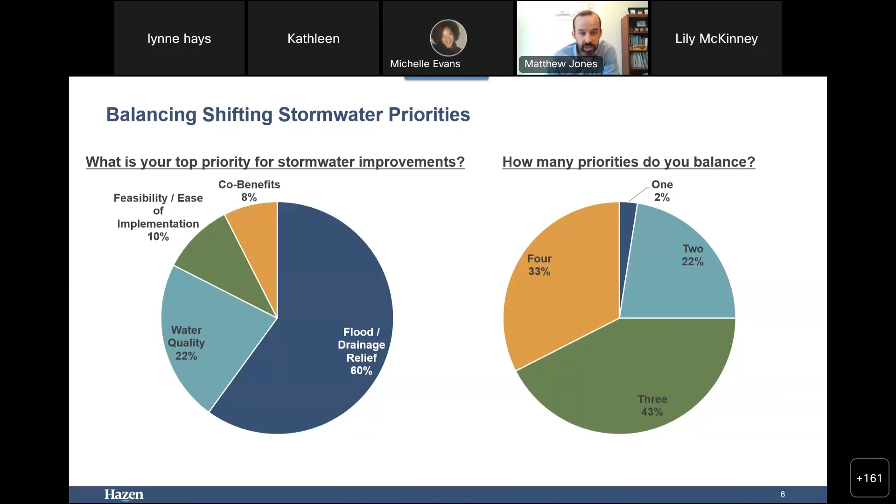Important context here: this is the Chesapeake Bay watershed, where water quality improvement and nutrient load reduction is a major focus. We asked two questions to about 40 to 50 people in attendance who responded to this poll. What is your top priority for stormwater improvements? You can see here 60% said flooding and drainage relief, even within a state that has major regulatory programs focused on water quality. Water quality was also a significant portion, but importantly, almost everybody was balancing multiple priorities.

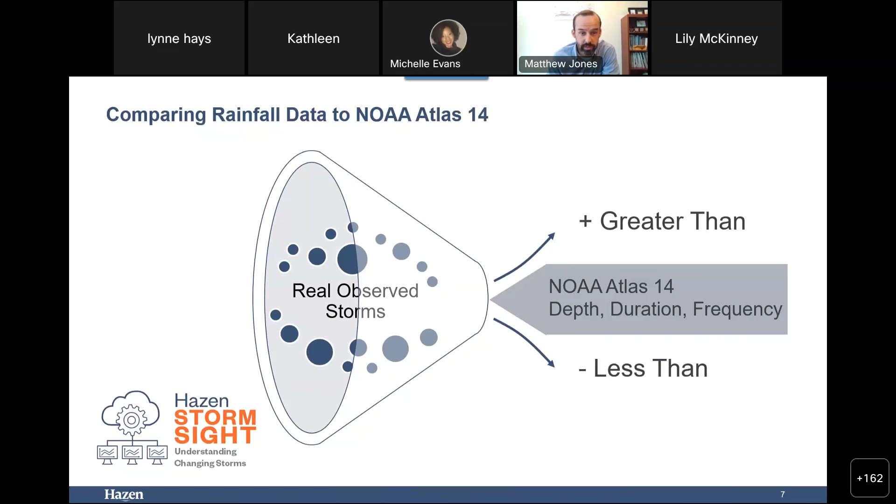This increases the importance of understanding what role green infrastructure might have in the context of changing storms and changing priorities related to flooding and drainage relief. So with those changing storms, we want to understand how they're changing. We have a tool we put together a number of years ago to help answer that question. We regularly get asked, that seems like a real major storm event, is that normal or not? This tool does some analysis, feeding in real rainfall data, breaking it into storm events, and comparing it to Atlas 14, to say whether storms are happening more or less frequently than Atlas 14 would suggest on average. Here's what that looks like for a few locations in North Carolina.

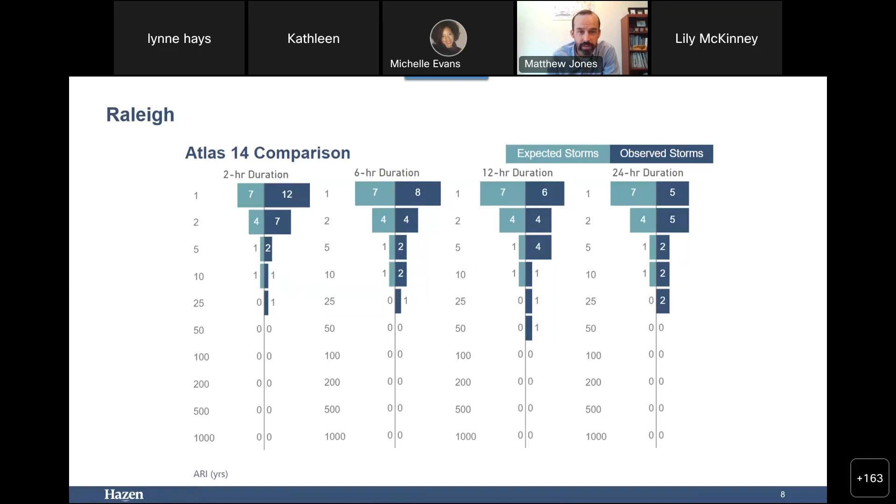You see different storm durations across the top, ranging from a 2-hour to a 24-hour duration, and recurrence interval down the side. For example, here in Raleigh, for a 6-hour duration 1-year storm, looking at about 7 years of rainfall data, we would expect 7 such storms but saw 8. You can see there are some departures when compared to Atlas 14. Some departures aren't altogether surprising statistically, particularly over a 7 to 10 year time frame, but we do see some differences.

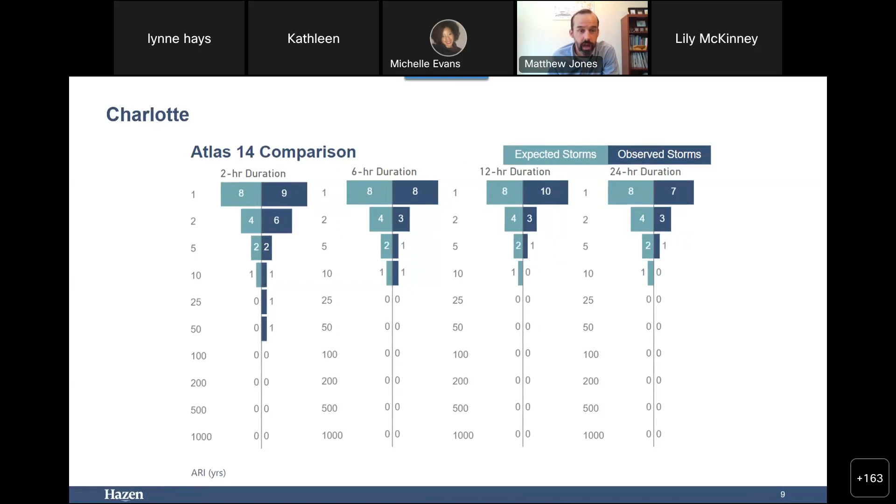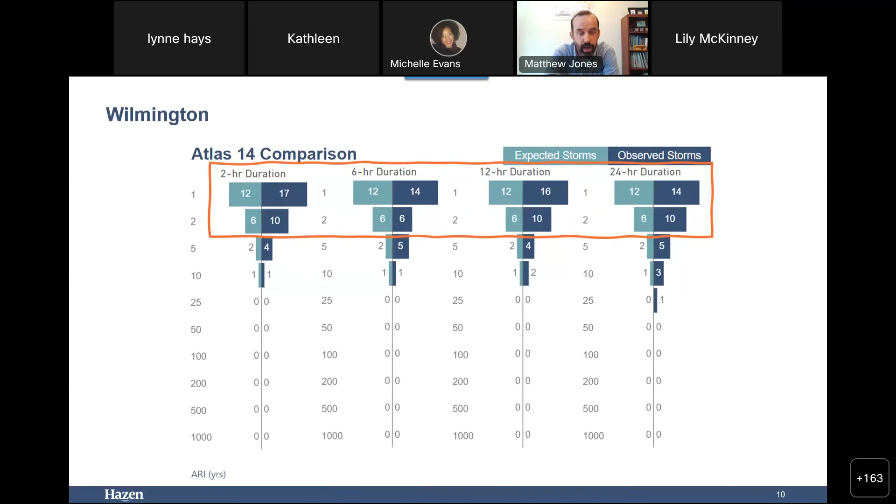Here in Charlotte, across the longer durations, it's pretty much in line with Atlas 14 expectations. For the shorter durations, we do see some departures with larger events. In Wilmington, we also see some departures, and notably, departures from what Atlas 14 would suggest for our 1 and 2 year storms. This indicates that over the past 12 years, we were seeing a bit more of an increased frequency of 1 and 2 year storms than we'd generally expect.

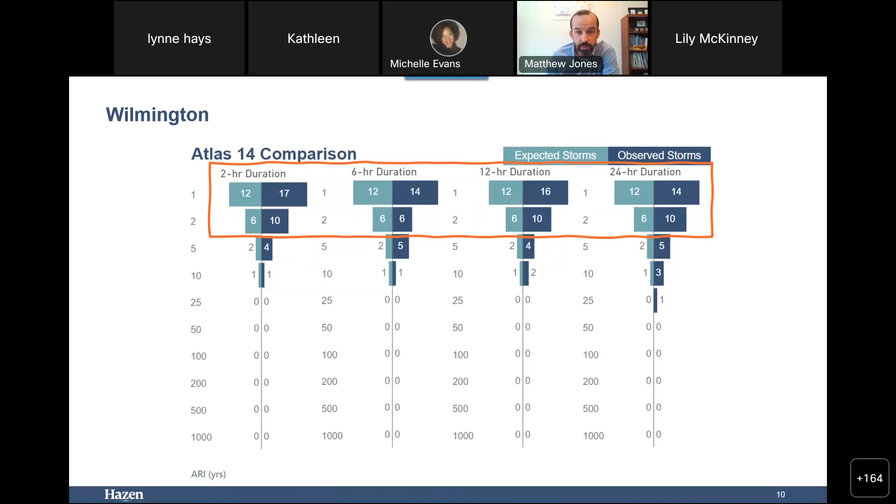One notable thing when we talk about green stormwater infrastructure in this context: I'm talking about stormwater controls designed to manage the water quality storm, in the neighborhood of an inch to 1.25 inches throughout our state. That's not the 10-year storm event, but closer to these more frequent storms we're having. It's also notable regarding the public's interests, since these 1 and 2 year storm events can cause nuisance drainage issues the public wants addressed. This gives early indications that green infrastructure may have a role in managing these more frequent storms where we're seeing departures from historical norms.

That's looking at the past, and that phenomenon of seeing departures, particularly for frequent events, isn't uncommon. We've run that analysis in a number of cities throughout the country, and it's a somewhat common finding. But that's looking backward over recent history. What about looking forward into the future?

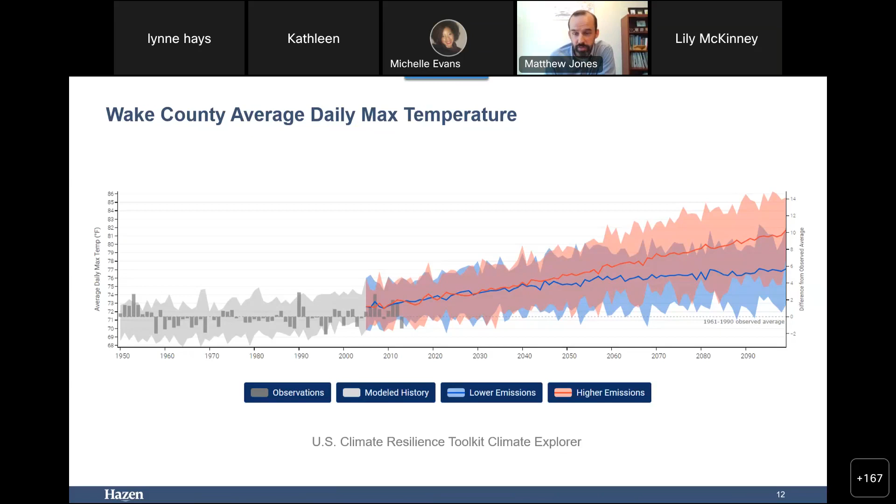But we do have some tools that allow us to look at that and approximate it. One is a SWMM climate adjustment tool that pulls in downscaled climate data, and for a given location, for different recurrence interval storms, you can see what projected change in that design storm depth is projected. So in this context, you've got different scenarios, different time frames.

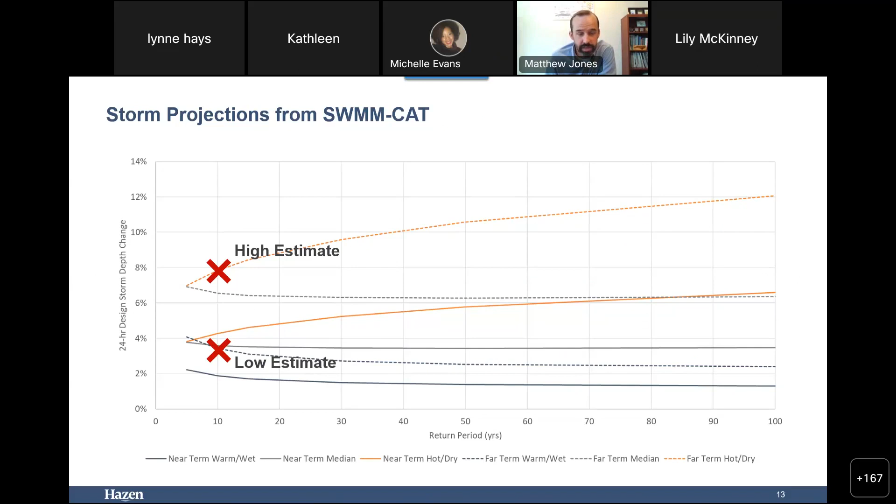To simplify things here, we'll pull in a high and a low estimate. When we look across North Carolina, you can see, here, this is for a 10-year, 24-hour design storm.

Much of what we're talking about here today is focused on that particular storm because that's a common target for drainage design and stormwater conveyance design. We're looking at a 2045 to 2074 timeframe. So here's our current 10-year, 24-hour design storm for these different cities throughout the state, and then a low and a high projected adjustment to that design storm depth, and what that means in terms of real storm depths.

You can see on the low end, those storms are projected to stay relatively the same. On the high end, on the order of a 5 to 6% increase, which translates to something less than a half an inch of depth increase.

Now, it's important to note here that there are a variety of ways of evaluating this climate data and coming up with different results. It doesn't cover North Carolina, but there was a recent study in the Chesapeake Bay watershed looking at potential changes to design storms throughout the Bay watershed. That study found those adjustments range anywhere from little change, similar to 5-6%, all the way up to a 20% increase for those 10-year design storms.

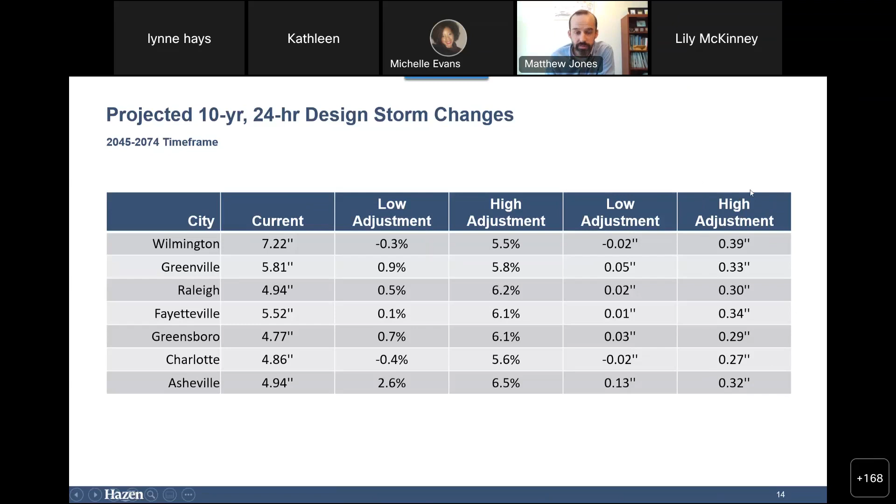But even with that kind of an increase, we're still talking about lower depths in the context of our common green infrastructure sizing, which is looking at a 1-inch storm event.

So how are storms changing? There's an increased frequency of smaller storms in many locations that could contribute to nuisance flooding when compared to our historical norms. And we see incremental increases in our 10-year storm depths.

Again, depending upon what analysis you look at or what data you're referencing, you can get into some different results. But I'm not aware, for something like a 10-year storm, of any projections, certainly not for North Carolina, that talk about doubling of these storm sizes or increases of that magnitude. We're talking about incremental increases.

So that brings us back to the question of what is the role of green stormwater infrastructure amidst these changing storms? Two sub-questions as part of that: one, can GSI mitigate incremental increases in storm depth associated with climate change? And two, can it play a larger role in managing localized urban flooding?

So beyond the competing priorities or changing priorities we discussed earlier, there would certainly be some benefits if green infrastructure can serve a valuable role here.

One of those is limitations of conventional pipe upsizing. This is something we're doing a lot of work on in some of the ultra urban areas in the country, where putting in a larger pipe network and carrying that to the receiving water is not a practical option because of the intensity of development and a variety of other constraints.

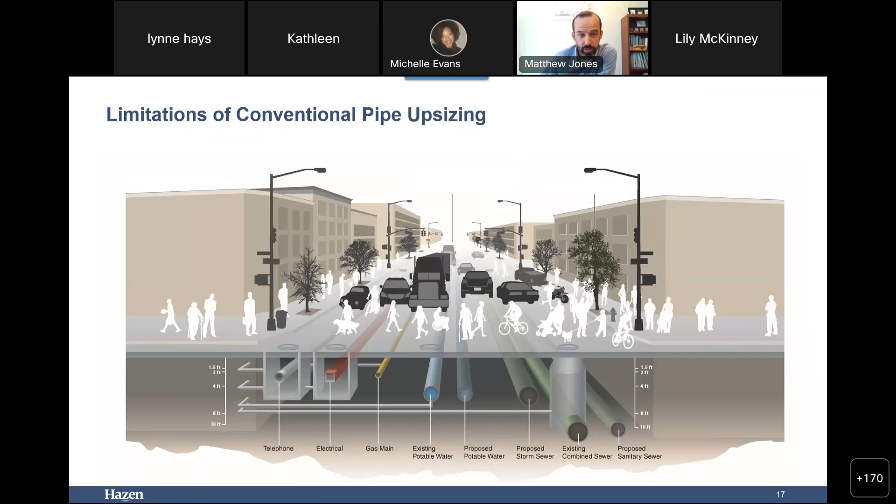And so in those cases, that's part of what we're looking at is what can green infrastructure do in those circumstances. The other gets to some broader implications for sustainability, community disruption, and that sort of thing.

When we talk about pipe replacement, spoiler alert, we'll talk about this at the end, but the point of this is not to say there's no further need for pipe replacement. That's going to continue to be a key tool in our toolbox here. But pipe replacement can often be a disruptive activity. Digging up a roadway has community impacts associated with it. From a sustainability standpoint, we haven't done a specific life cycle analysis, but you can certainly imagine the impacts in terms of greenhouse gas emissions and other sustainability factors of excavating a material, disposing of it, and replacing it with new material.

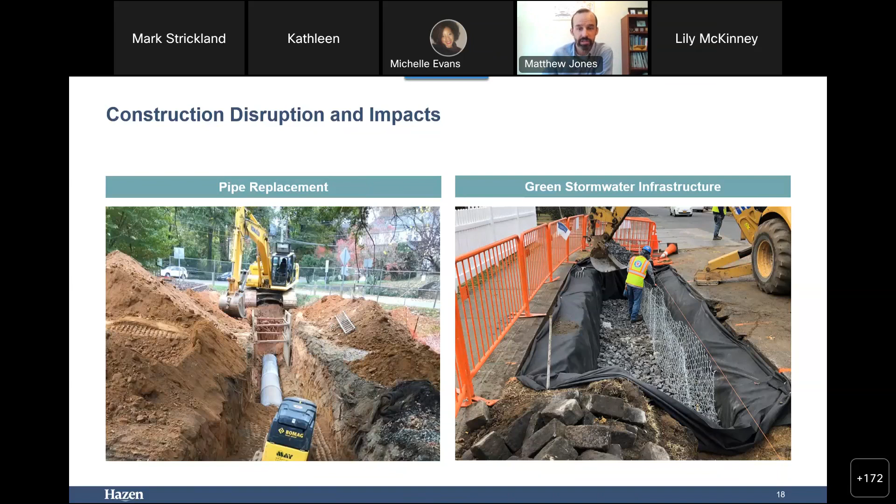Again, an important tool, but pipe replacement can be disruptive. Green infrastructure can bring its own disruption, but it would certainly provide some benefits if it could be a tool in our toolbox to help offset some of these increased storm sizes, effectively prolong the life of our buried infrastructure, and delay the need to upsize some of that conveyance infrastructure. So that was one of the key questions we wanted to consider and why we were contemplating this question.

Beyond looking at some of the high level comparisons of changing storm sizes and that sort of thing, we wanted to get into the hydrology. So we did that looking at a generic curbside bioretention, like you see illustrated in the figure here. It was sized to store runoff from a 1-inch storm event. We assumed a soil infiltration rate of a half inch per hour, and then we routed a 10-year, 24-hour NRCS hydrograph through that facility.

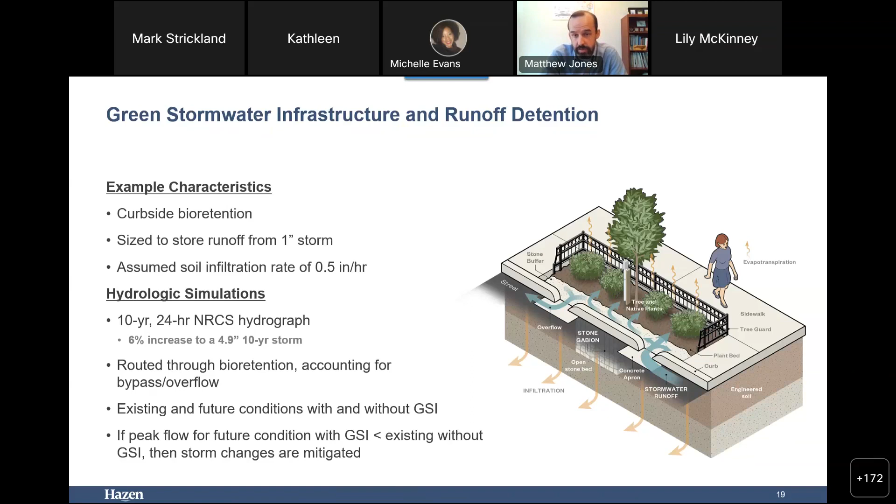We accounted for both the current standard, in this case a 4.9-inch storm, which I think is for Raleigh and one other, but representative of a North Carolina storm, and a 6% increase for that future climate scenario. We routed the flow through the bioretention, accounting for any bypass and overflow. We looked at existing and future conditions with and without GSI, so a total of 4 scenarios. The fundamental test we applied is: if the peak flow for our future condition with green infrastructure is less than the existing condition without green infrastructure, then we effectively mitigated those changes associated with climate change and changing storm characteristics.

So our first scenario that we looked at is basic bioretention. Water flows in through a curb cut, gathers in a shallow surface depression, infiltrates into underlying bioretention soil, and if the capacity is exceeded, it spills out and continues down the roadway.

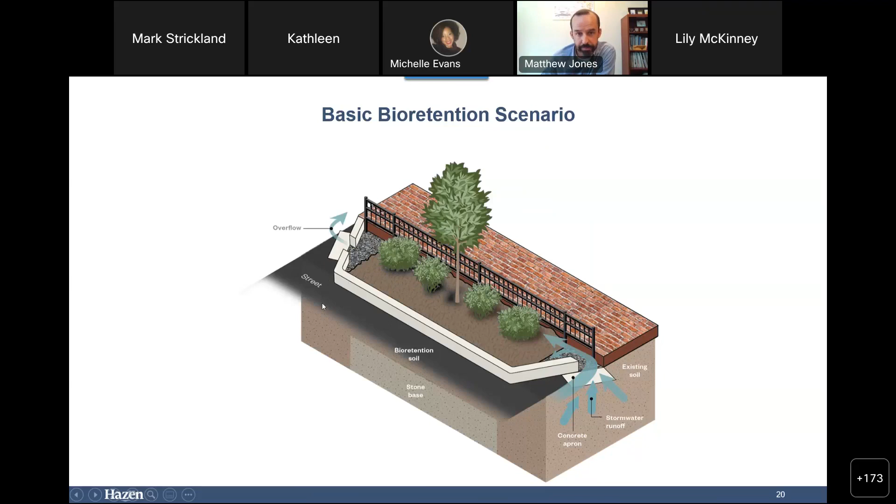So here's the results. There's going to be a sequence following this pattern. We've got the sizing target, some of these other features we'll talk about in a moment, and the storm. Again, all this is focused on the 10-year, 24-hour storm. Here's our hydrograph, time across the bottom, flow here, and these are our peak flows. So without green infrastructure, under current circumstances, we got a peak flow of 6.5 CFS per acre.

With green infrastructure, under the current climate, that knocks it down a couple tenths of a CFS. As we'd expect, under the future climate scenario with a larger storm event, we see higher flows. And in this case, we're not fully offsetting that. In fact, we see a 5% increase from the existing condition. You can kind of see what happens here.

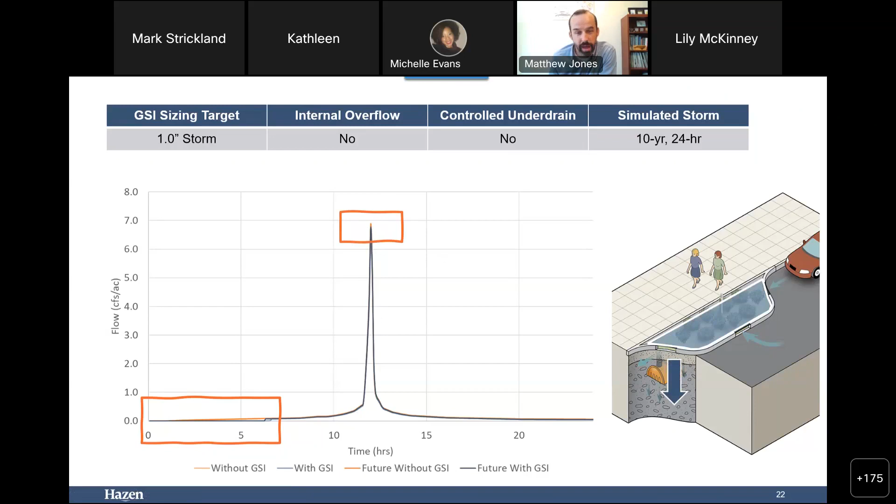So when you look at our hydrograph, what's happening is this surface depression is filling up at the beginning of the storm event, and then the movement of water into the bioretention soil, in the context of our 10-year storm event, a larger storm than we would typically expect our bioretention to manage, exceeds that capacity. We do get a small reduction in peak, and that's really tied directly to the amount of water moving into the soil at that point in time. So in this particular scenario, the green infrastructure capacity was exceeded well before the storm peak. We get that marginal peak reduction attributed to the direct effects of infiltration. You see that in both the current and future conditions, and this did not pass our test for mitigating impacts of changing storms. So as a green infrastructure proponent, I'm not very excited at the moment.

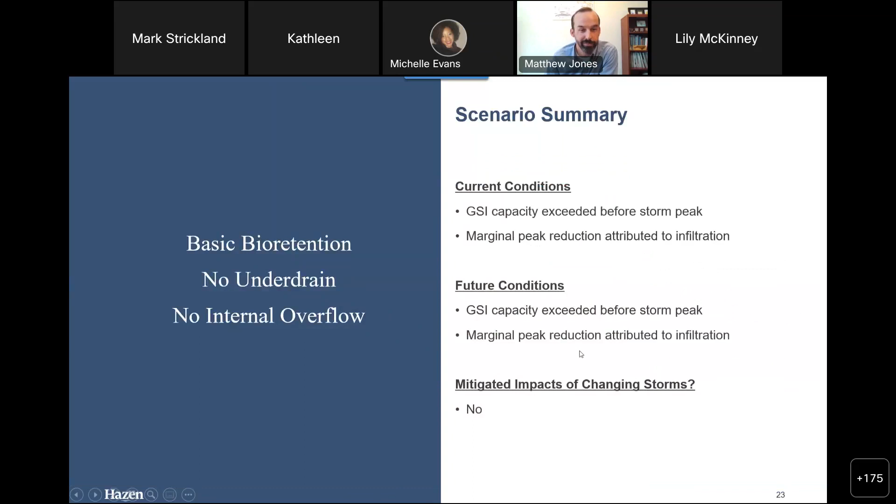But fortunately, we have a lot of options and design tools that we can apply that may help with this. It's important to note that a lot of these tools are not necessarily new. They may be new in being implemented in this context of trying to use green infrastructure to provide drainage relief, but many of them, in fact all of the ones we'll be talking about here today, are used with some regularity in CSO programs to maximize the volume capture of stormwater with green infrastructure.

So the first tool we want to look at here is incorporating an internal overflow. That could take a variety of different forms. We can have a stone gabion that's providing a connection between the surface and the stone bed.

We could have a perforated riser. Here's an example, both of these, a perforated riser inlet connected to a perforated distribution pipe. Here's an example of the latter - we've got a vertical pipe that connects into a distribution pipe within the subgrade of this bioretention.

It's raised just a couple inches above the surface. It's got a grate on it, which is removed in this context. And from a maintenance standpoint, we've got a screen that fits down inside that to catch anything that's coming in, so we don't want solids to get down into our distribution pipe at the base of the bioretention.

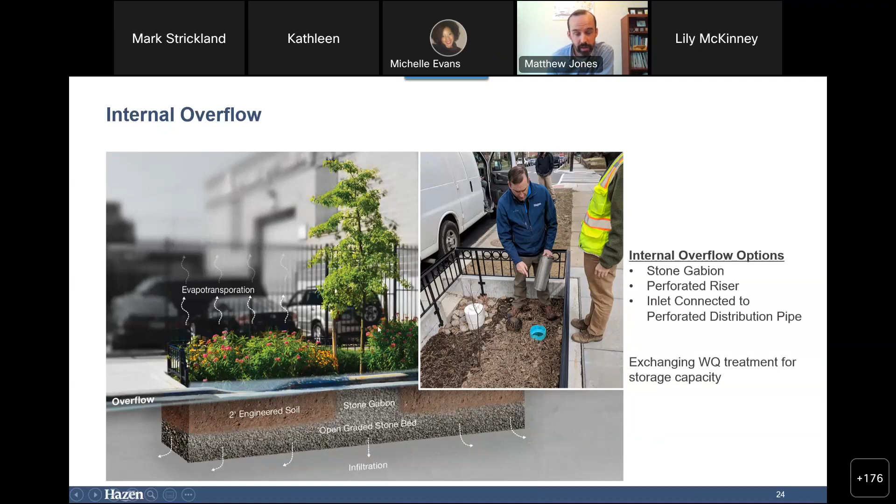We try to mitigate that in some circumstances, as you can see from this photo. This riser is elevated a couple inches above the surface, so we encourage at least some portion of that first flush to infiltrate through the bioretention soil, but provide another mechanism for water getting into the system.

So the next design modification we're looking at, again also used with some regularity in CSO programs, is a slow release orifice or some kind of flow restriction on our underdrain. That can be a cap with a drilled orifice. Here's an example of the Philadelphia Water Department detail that includes the flow restriction in that manner. It can also be a weir wall with some kind of orifice plate or other flow restriction in that weir wall.

This is a schematic used for some larger green infrastructure designs implemented in parks and other areas, but the concept is the same here even at the smaller scale we're talking about. It could be a valve restricting that underdrain flow, or even an automated valve regulating the flow out of that bioretention. For this scenario, we adjusted that underdrain flow restriction to maximize storage within our bioretention for the 10-year event.

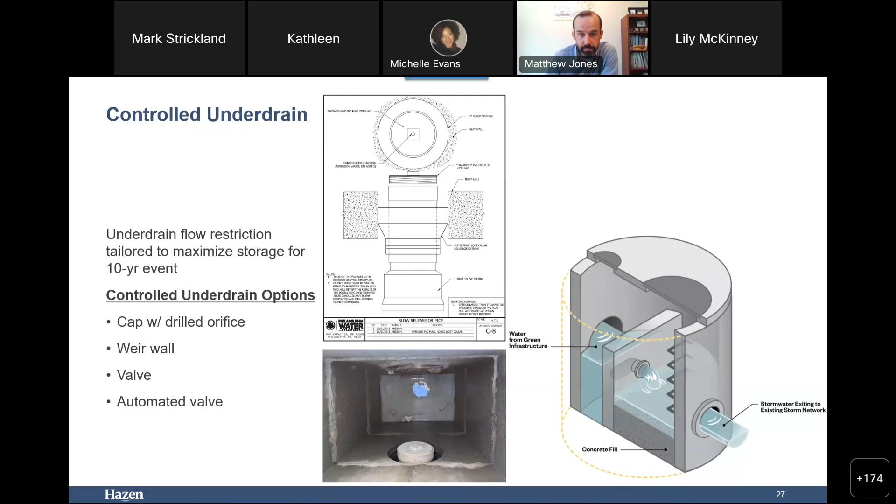I mentioned the automated valve could be an option here, and that in particular could be beneficial. As I said, we did static sizing of an orifice to maximize storage for this 10-year 24-hour storm, but with automated control you could change the storage characteristics to optimize storage for whatever storm is occurring or projected to occur for a particular installation. So when we look at this scenario summary, we're getting flow regulated throughout the storm, substantial peak reduction, and we are mitigating those impacts for changing storm events.

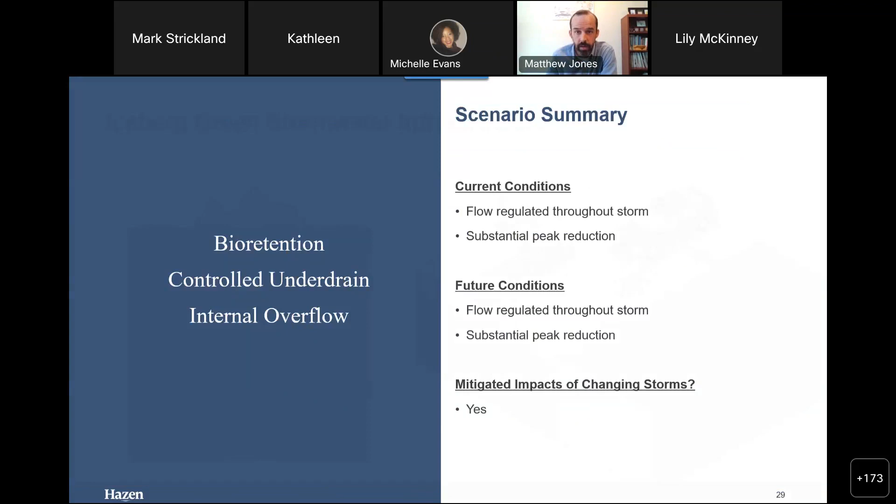We also want to look at what other options we have. One of those is what I like to call iceberg green infrastructure - in general, a larger green infrastructure, a larger bioretention. In this particular case, looking to size it for a 2-inch storm target. I mention the iceberg green infrastructure because many times in an urban or developed environment, you may need that type of approach. You may not have adequate storage surface space, but you can distribute a larger subsurface footprint to provide some of that storage we're focused on.

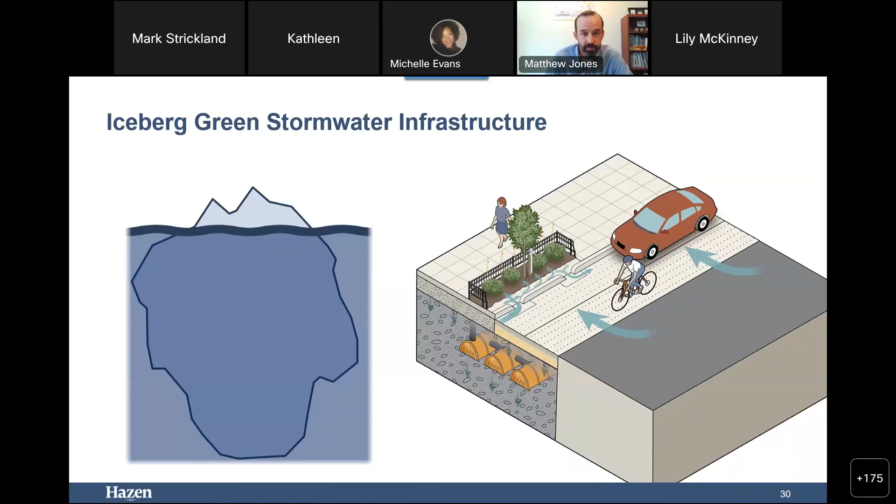So in this scenario, retaining the internal overflow and the controlled underdrain, you can see we see a substantial reduction in peaks, which is not surprising given that larger storage volume.

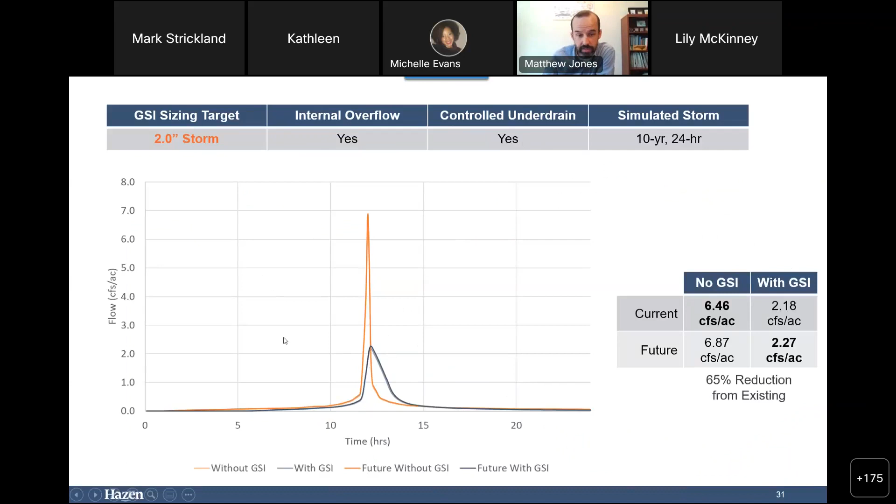And then the last scenario I wanted to speak to is this concept of a gutted bioretention. As a green infrastructure engineer, this may sound somewhat like a horror movie, taking our nice bioretention and stripping it of all the things that make it a bioretention area in many respects.

So in general, looking at a responsive repurposing of bioretention to maximize the storage we're providing and to support drainage relief. So removing those treatment elements like the bioretention soil, perhaps even the stone, and really doing whatever we can to maximize storage within the footprint, whether that's using just stone in place of soil, or including different HDPE chambers or grid structures to maximize that void space.

So this is truly a case where we're really reducing the water quality benefits, but really trying to prioritize drainage relief and capture. And part of where this may come into play is the potential to retrofit a facility near the end of its functional life.

Or, we talked about the shifting priorities that we have seen, but thinking about in future instances how green infrastructure may operate if drainage relief and flooding becomes a major priority. And one of the things we've seen in some other areas is within a watershed, maybe there are other means of addressing and supporting some of the water quality goals.

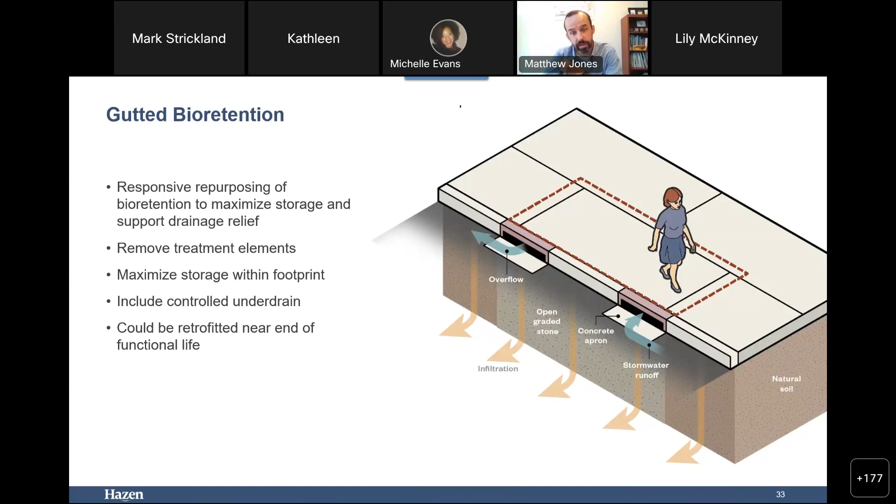So looking at a retrofit near the end of that functional life, you may have to look at replacing that facility anyway to maximize that storage space.

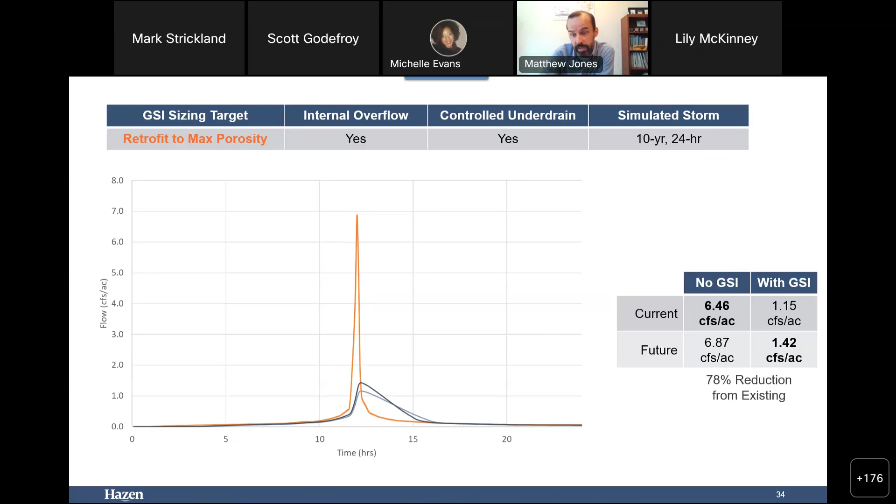And so in this case, we're sticking with that 1-inch green infrastructure sizing target, but by stripping out all of those treatment elements, we increase the effective porosity of the system quite a bit. And you can see by doing that, even without resizing to occupy a larger footprint, we're able to realize some substantial reductions, a 78% reduction in this particular case from that existing condition.

So when we look across the summary of scenarios, our basic bioretention or incorporation of just the internal overflow doesn't really have a meaningful impact in terms of mitigating climate impacts. But when we layer that with some of these other adjustments, we can see anywhere from marginal to substantial reductions in our peak flows, even beyond those projected for future climate conditions.

And again, I noted earlier for this scenario in terms of the design storm adjustments, we were using a 6% adjustment, so a fairly nominal adjustment. But with some of these other things, if we're able to reduce in the neighborhood of 50% or more, we've got some potential capacity to mitigate even larger adjustments if those projections change in the future.

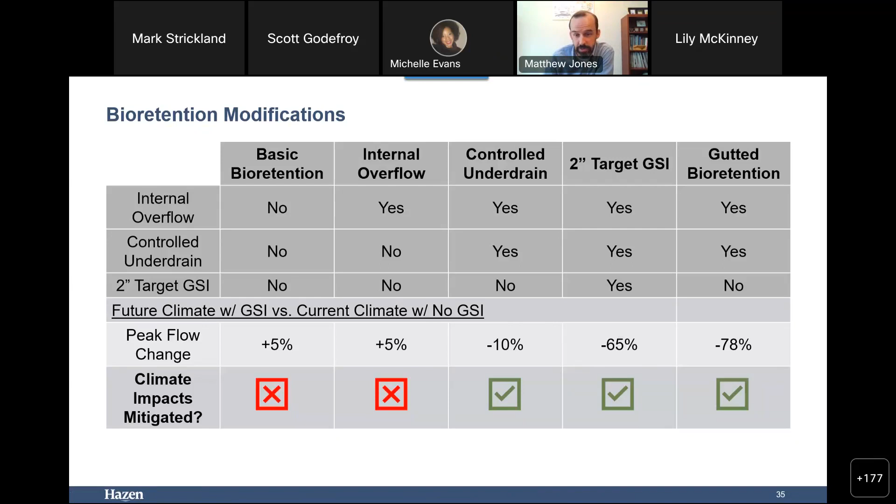So back to our question: can GSI mitigate incremental increases in storm depth associated with climate change, and can it play a larger role in managing localized urbanized flooding? The answer to both of those questions is yes, but as Bill Hunt, my friend and advisor, often says, it depends. Part of the toolbox, but it depends upon a number of site specifics.

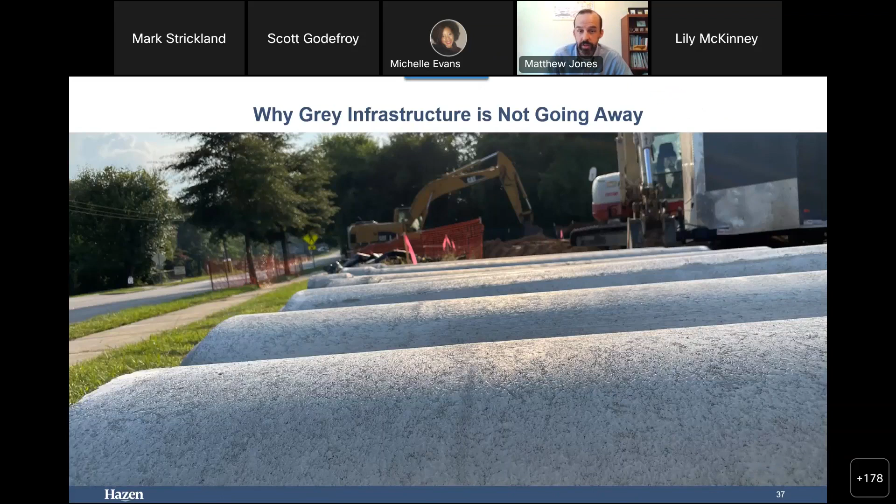So our gray infrastructure is not dead yet. It's not going away. As I said earlier, it is certainly an important, will continue to be an important, and really the predominant approach for addressing drainage issues, both existing drainage issues and those associated with future increased events.

And that's for several reasons. One, the green infrastructure is not addressing the entirety of the storms. We're focused more on mitigating those changes or increases in storm depths. And another thing is just logistics of where we're putting in these features with controlled underdrains. Those underdrains obviously have to have a drainage network that they're connected into, and that sort of thing. So I want to be clear that the takeaway here is not that we don't need pipes anymore. We need only green infrastructure.

There are some other factors in play as well. One is siting constraints. We talked about siting constraints for upsized pipe infrastructure, but green infrastructure has siting constraints too. For the routing exercises we looked at, we assumed we could route flow to green infrastructure with capacity to manage it, but that may not always be the case. When we scale up to a watershed scale, there's a lot of experience through CSO programs and consent decrees trying to maximize implementation, giving us good context for what degree of implementation may be practical within an urban area.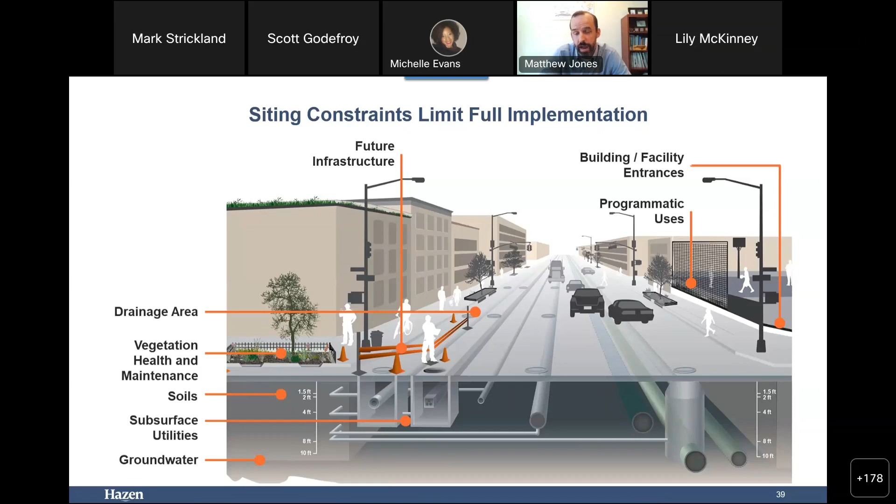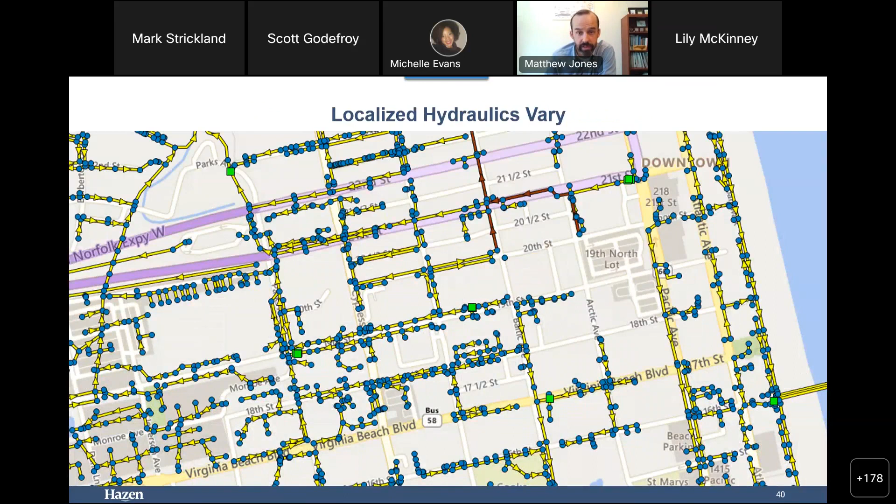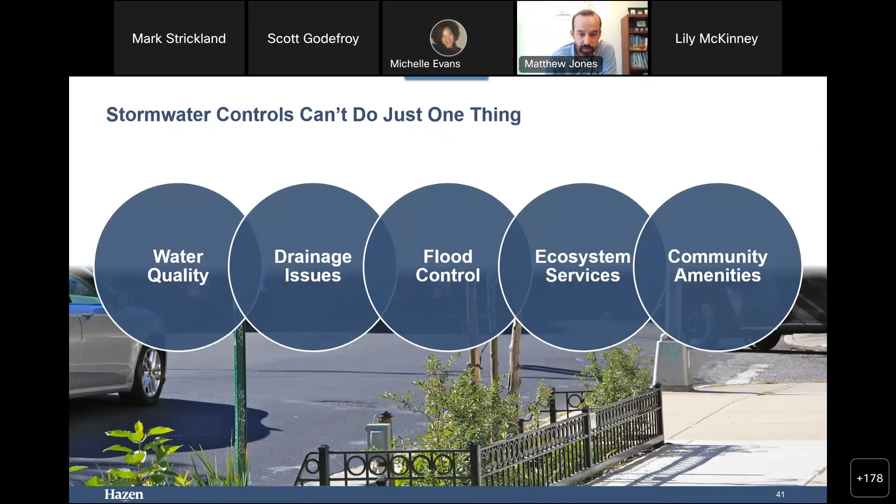But it's also important to note — those are some of the limitations — that especially amidst changing priorities, stormwater controls increasingly can't do just one thing. So we try to look across the full array of what the role of this green infrastructure is, both now and in the future, and consider that as we're underway with planning, design, and implementation efforts. Increasingly, we're seeing a lot of incorporation of multi-function stormwater management areas.

I think that's going to be a real valuable tool in our toolbox as we look at how we mitigate the effects of changing storm events — where can we incorporate more storage, more detention in a distributed fashion throughout our urban environment through things like modified bike lanes and parking lanes. The examples we talked about here focused on bioretention, but the same underlying concepts apply to permeable pavement and other green infrastructure approaches.

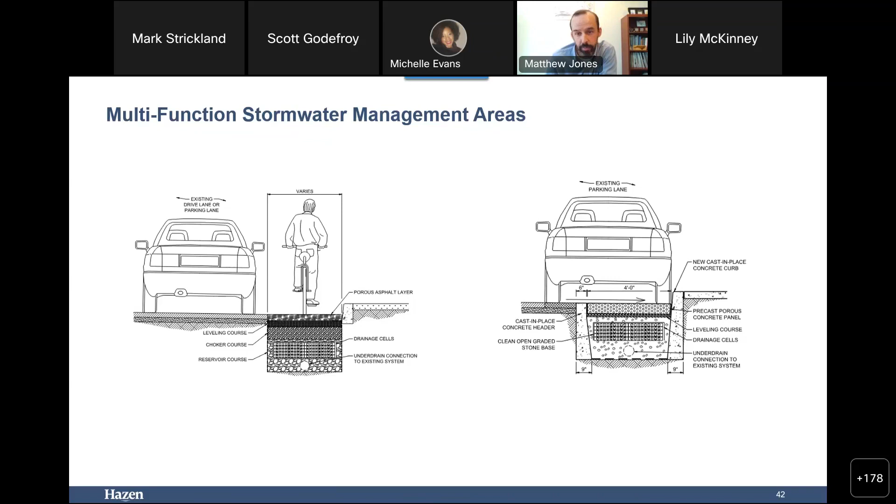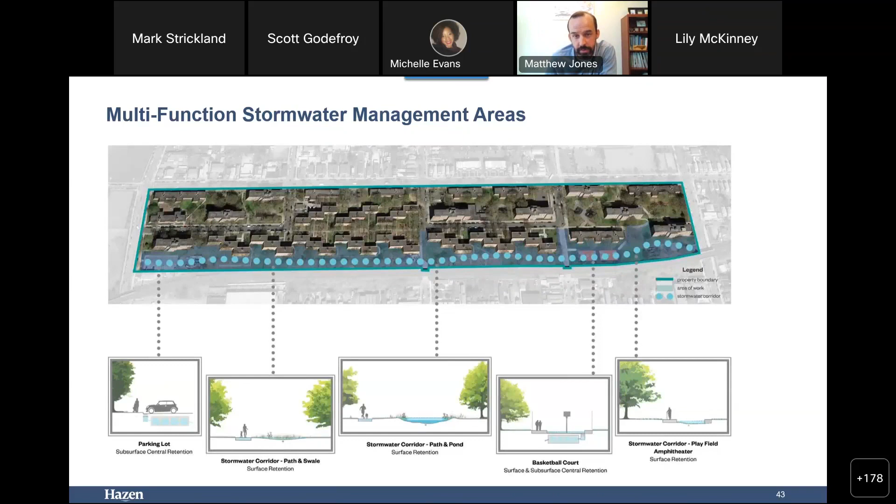Here's another example — work we're doing up in Queens, New York, at a public housing facility, looking at a variety of tools. How can we distribute green infrastructure and stormwater controls throughout the site in ways that provide multiple functions? One of my favorite examples, with the design completed and going into construction soon, is a basketball court. Underneath it is a subsurface retention system with chambers and voids to help filter the runoff and provide some storage for smaller events.

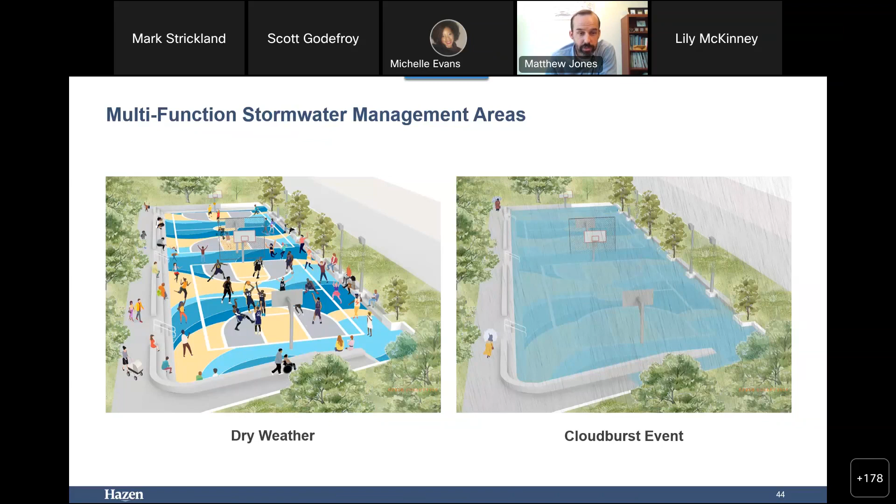But during the larger events, these cloudburst events, the court itself is depressed and provides direct stormwater storage. So really thinking about how we can get the most storage and make the best use of the space we have available in the urban environment.

Really, one of the big takeaways, back to this fundamental question of what is the role of green infrastructure amidst changing storms and flooding concerns, is that it's about building a bigger toolbox. Some tools are tried and true approaches we've used for decades. Others are newer, whether it's green infrastructure, tying in adaptive and real-time controls, or doing all of those things in concert with each other. It's increasingly going to be important to have a bigger toolbox available to us.

I think the work we've done has shown that green infrastructure does have a seat at the table. It is not a silver bullet solution — I know we all wish we had one for the stormwater concerns we face — but it can definitely have a meaningful role. The other important point, and what I'll close on, is that it fits with the broader approach of building adaptability for the future.